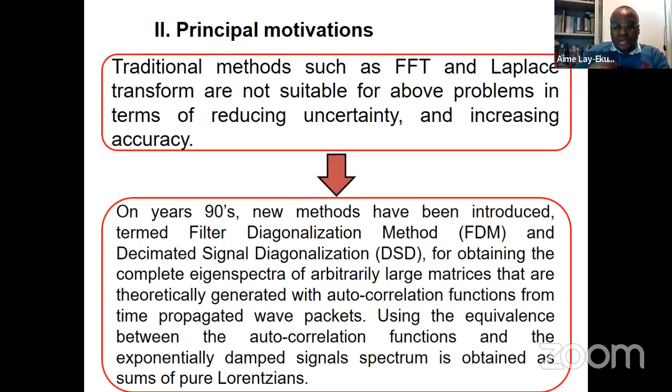So this is an example. You have a set of damped exponential signals. This is the signal you use when you want to make the FFT or the Laplace transform. The idea is to transform, for instance, the nonlinear signal into a linear signal, in which it is possible to determine two elements: the amplitude D and the frequency omega.

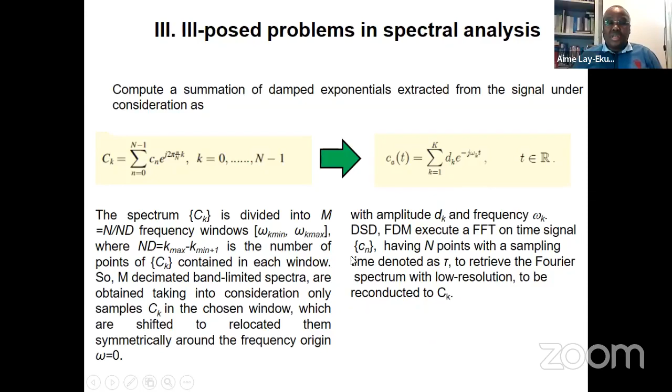So these functions are very, very important, because for the first time we are able to make the inversion, the reverse of the matrix, without suffering from ill-posed problems.

What are the ill-posed problems? They occur when you have a matrix with inner elements which are very close, so it is difficult to make the reverse, the inversion of this matrix, because in making the inversion of this matrix, you have two problems.

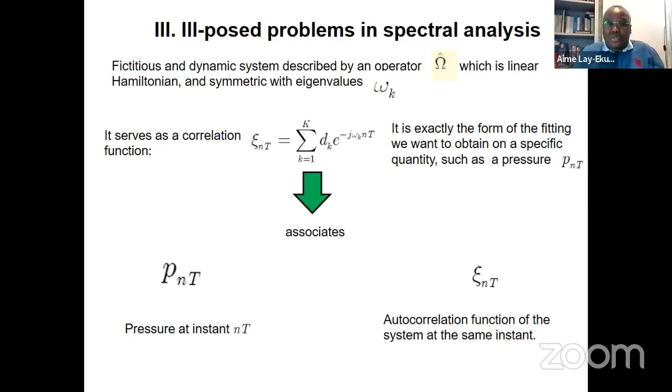You have overflow or you have underflow, so it is not possible for you to continue with this computation. So we developed a system allowing us to make the inversion of these matrices, U1, U0.

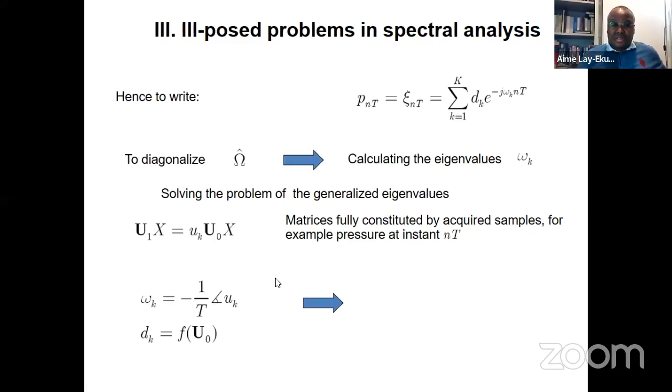In this case, we are able to calculate the frequency and the amplitude. Given the frequency and the amplitude, we are able to reconstruct the signal. This is what we are trying to do, with success.

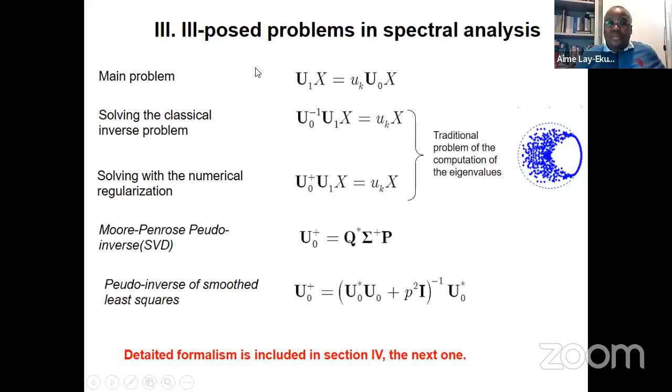Look here, on your right, you have the circle with a radius of 1 as value. If all the eigenvalues are included in the circle, it means that the inversion of all matrices is fine, so we have solved the ill-posed issues.

So look here at some examples, you can see our experimental data. There is a reference in Measurement Science, MST, Measurement Science Technology, making different inversions. We can use the Tikhonov regularization algorithm.

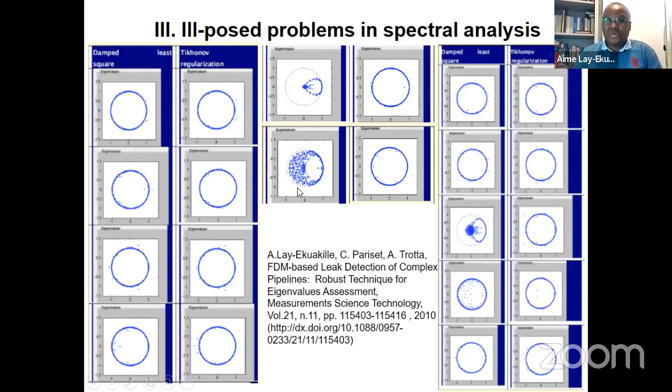We have improved these issues, and the best thing is all eigenvalues are located inside this circle with the unitary radius.

So now we can speak about the FDM. Given a set of samples of the signal, we have to transform this set into something which is symmetric, dealing with the Hamilton theorem.

So we compress all data from this equation, where we have detected the amplitude and the frequency, into something more mathematical, easier. So the idea is when we have the vibration within the signal, starting from the initial state, we need to make this inversion.

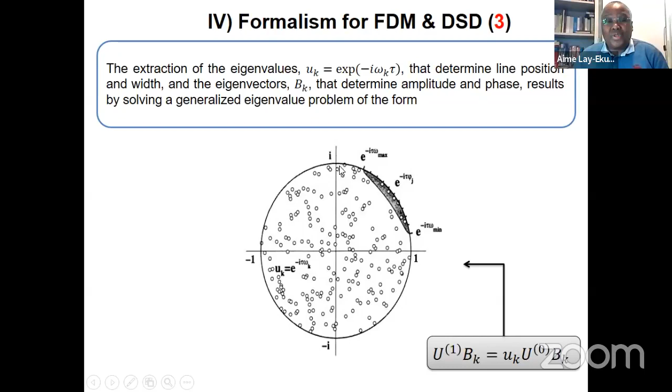Making this inversion, we are able, thanks to the Tikhonov regularization or the SVD, singular value decomposition, to find successive solutions. So the idea, as I told you before, is to have all eigenvalues within this circle, and something also peripheral is also possible.

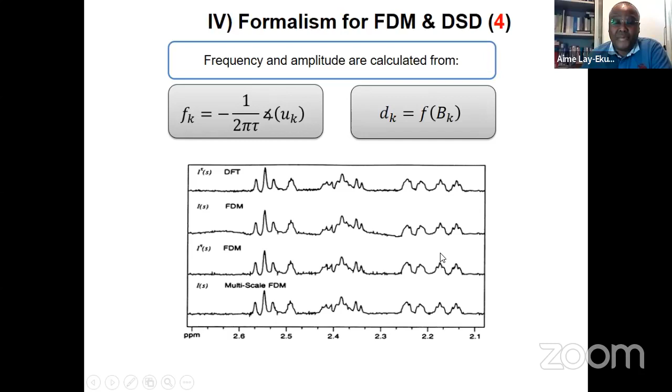What is the difference? The difference is that in direct Fourier transform, we lose some information, which we have to see after this slide. This is a classical one. This is the algorithm regarding the FDM, which we have provided, writing for the first time the algebra of this FDM.

We are not the authors of the FDM. We are the group that worked a lot on the FDM in order to adapt it to engineering situations. So now I can show you the second algorithm, which is DSD. What is the difference?

The difference between FDM and DSD, decimated signal diagonalization, is the following. FDM can work with a large signal with a lot of samples, but DSD, as the name decimated suggests, truncates the signal. So it is a quick processing with a short amount of signal.

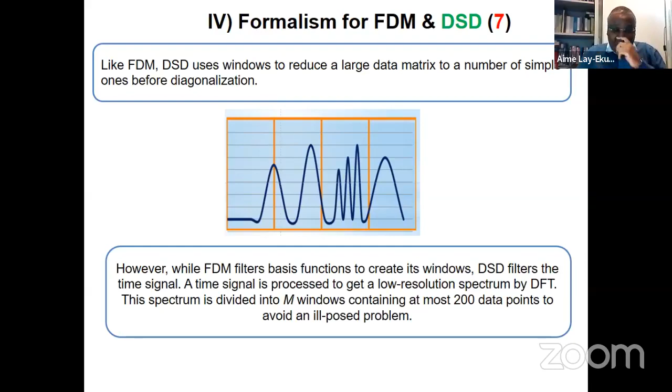When you have a signal with different amplitude and samples, the problem is if you want to process this signal, you need to make a windowing process to divide the signal into different windows. So it is a large signal you divide into different windows. Making this windowing, it would be easier for us to process the signal. You do it with the FFT.

With the DSD, for instance, the DSD absorption, look here. In the DSD, similar to FDM, we can distinguish, we can discriminate two peaks of the window under which we are processing the signal. In FFT, we don't have this discrimination. We cannot distinguish. So this is a loss of information, okay?

In DSD, as regards FDM, we can make this difference. If both peaks coincide, like here, it means a loss of information.

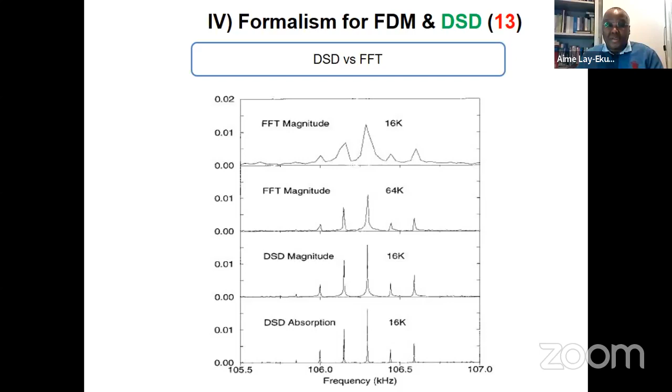So let me, with your permission, show you the first application. You are in the Faculty of Agriculture. You may know that in many countries, in Asia, in India, also in Europe, as well as in USA, we face a challenge related to leaks, leakage in water works.

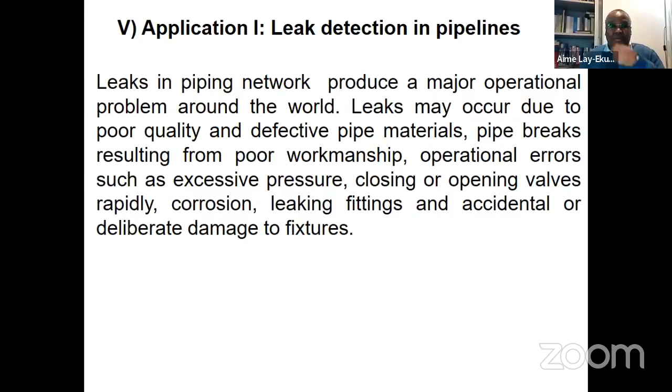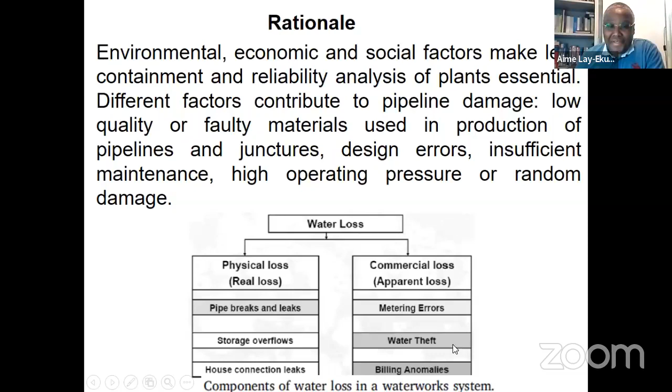So the reasons are manifold, multiple: physical loss, pipe breaks and leaks, storage overflows, house connection leaks, metering error when you measure the amount, the quantity of water used in your home, water theft, billing anomalies.

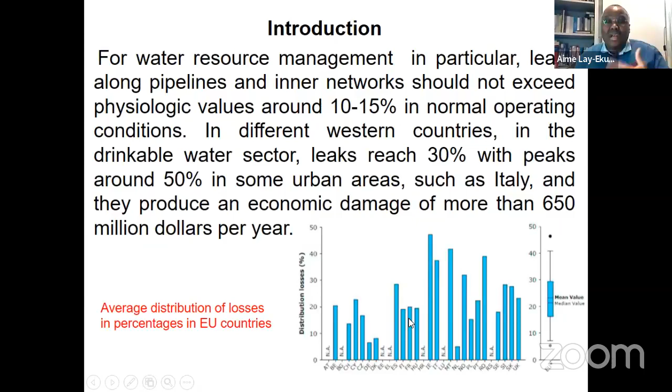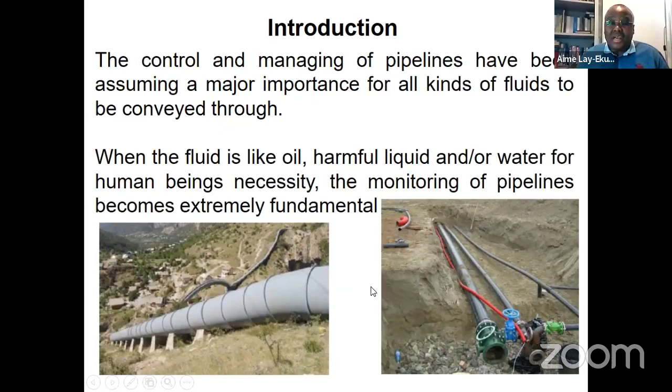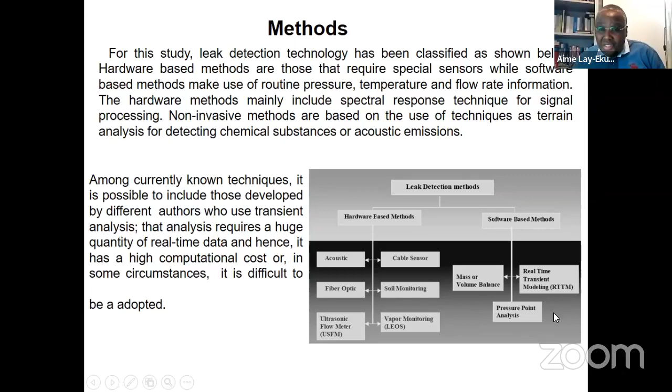We deal, our issue is in pressure point analysis. Look here, this is an example of a technique used to detect water leaks. We send a signal. The break of the signal means there is a leak.

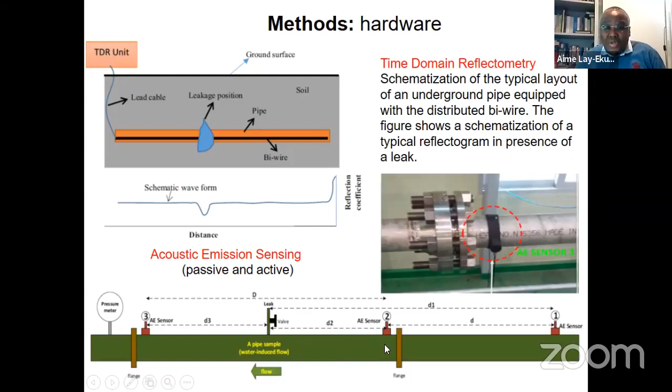But in this case, we need to use, for instance, metallic pipe. Otherwise, we have to put a wire inside along the pipe. This is the time domain reflectometry. We can use acoustic emission sensing, sending an acoustic emission and looking for reflection of the signal along the pipe. And we can use vibrations with sensors close to the pipe, detecting with a laser LDV, laser Doppler vibrometer, and processing.

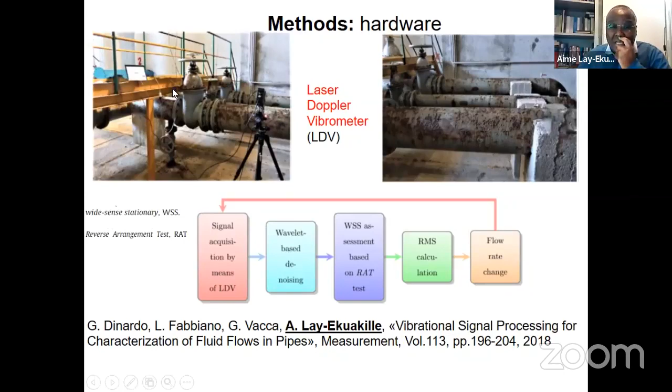And we can use a camera, with an opening here in our lab. You open the pipe like a water tap, and you can see the rotation, the motion and movement of the water, and you can detect, in this case, only the speed.

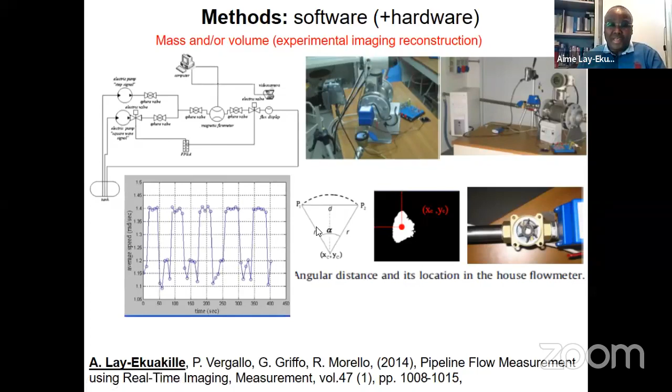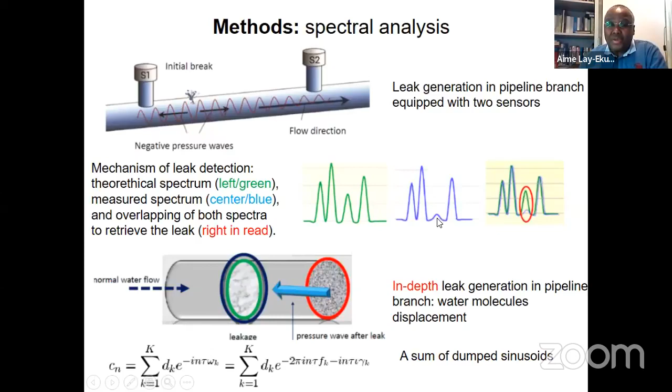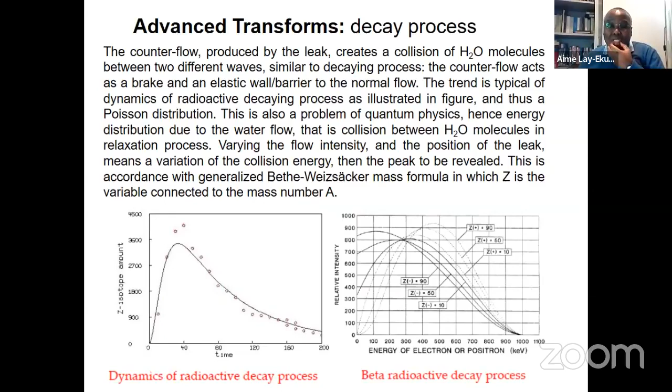So in general, this is the theoretical spectrum, and this is the measured spectrum by means of a sensor, and we make a comparison. If there is a matching between this point and this point, we can see that there is, in reality, a leak. So it is a decaying process, similar to what we use in nuclear physics and quantum mechanics, quantum physics.

In FDM, our idea is to consider the pipeline leakage as a thrombosis, as it is done in the human body. So we are in our lab. This is a magnetic sensor, and we pump water in our experimental system, pipelines, and normally in the city we can use a sensor like this.

We can put close to the sensor something for transmitting, a transmitter, for transmitting the signal. So you can stay far from the point when you want to measure the detection, and the transmitter transmits the signals to the central station, a central area where all information is collected.

Okay, so this is a part of the experimental data. We make it. We have different sensors, and we get here. You can see here the result from detecting with the different results.

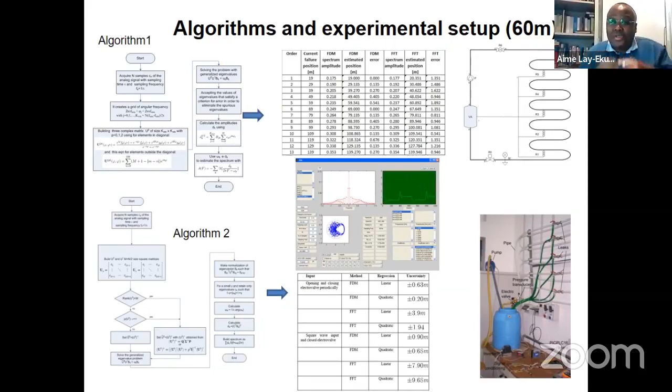FDM exhibits high accuracy. Here we have 60 meters for this part. You can detect the leak with an uncertainty around 20 centimeters, while with the FFT you can arrive at up to 1-2 meters. So this is very important. This is the key issue. It is very, very different.

In DSD, the difference between FDM and DSD is in the number, in the amount of data. DSD needs a short group of samples. So we do the same. Look at here, the difference, FDM, DSD. This is the regression technique we use to process the data.

And look at here, changing only, this is from leak 1 up to 6, we are in the ascending wave. So we pump from down to up. Here, from 7 to 11, it is in the descending. So in descending, we have high pressure. You can detect with good accuracy.

As I told you before, we can work with this experimental application at your university. This is the complete, full system with the hardware, computer, and different sensors, the 3 sensors.

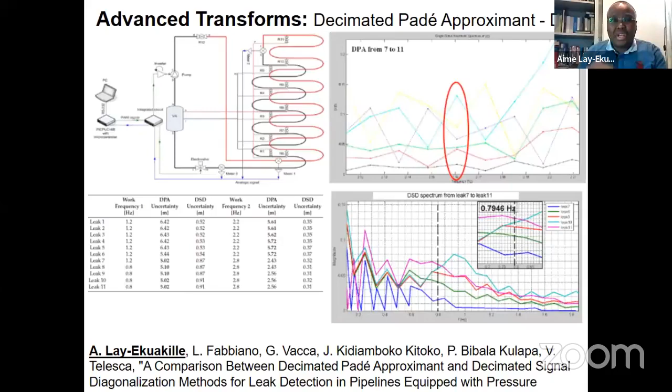Here we use another advanced transform called the decimated Padé approximant. We can use it also. And in this field, the DLP, decimated linear predictor. This is another advanced transform.

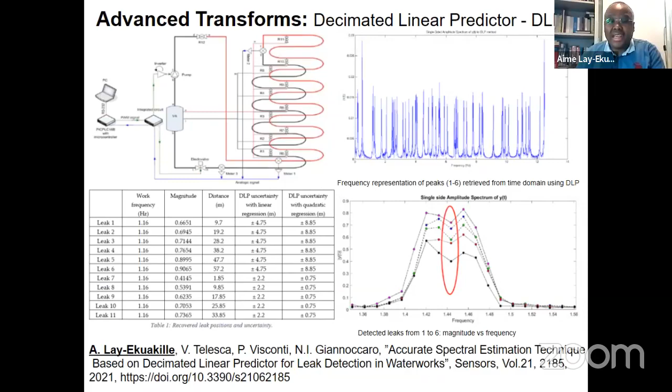So in general, for monitoring systems, we can also use the camera mounted inside the pipe, and we can use a robot working for pipeline with a huge diameter. We can launch a robot for inspection.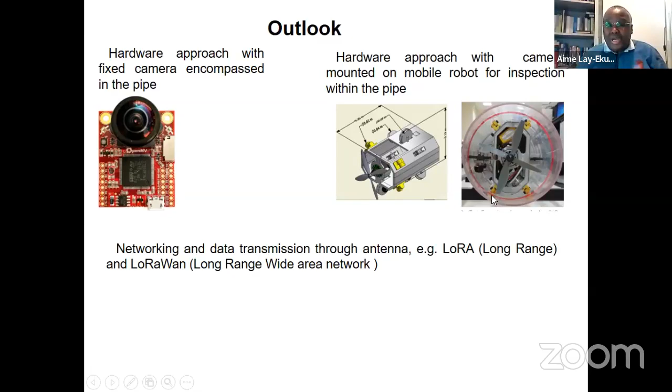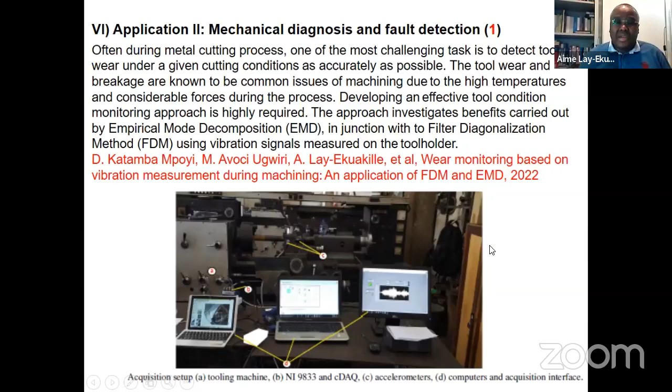And the second application is in machinery. You have a vibration. You can detect the vibration, processing it, and you can see the wear of a machine. This is an example. So you can establish a mechanical diagnosis and detect the fault thanks to FDM instead of other techniques like kurtosis, you can see the difference.

Here, no problem. This is a tool without wear. Few with a defect, a huge wear. So look at how FDM is able to diagnose this issue. This is another example with my PhD student in Mexico.

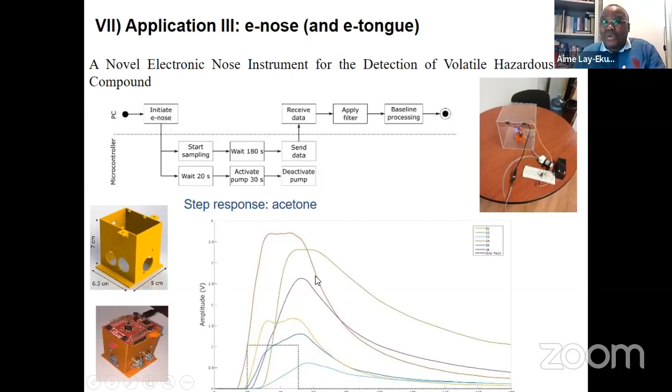We are constructing an eNose for food quality detection. So when you need an inspection at the port authority, at the airport, at the market, you don't need to take a sample to bring it to your lab. This is something like lab on chip. So you can do it at the market in Delhi, in your city in Jaipur. You can do it in real time, and you get the response of different materials. So to make a discrimination between different foods, we use the FDM because, as I told you before, of its high accuracy.

I also use this in pipeline issues, where we try to detect the vibration of the water molecules, hydrogens and oxygen. In EEG, we are studying neuropathy, we need to see the variation of oxygen within the blood, up to the brain, from one part up to the brain. So I think it is the same process. In water works, we deal with the water flow within a pipe. Here we deal with the blood within a vein, within the artery.

Okay, so what to say in order to conclude this presentation? We can use these advanced transforms where we need, with the vibration, when we try to catch the vibrations of different liquids, vibrations of gaseous materials, and the reciprocal vibration, the vibration of the sound, you can use it.